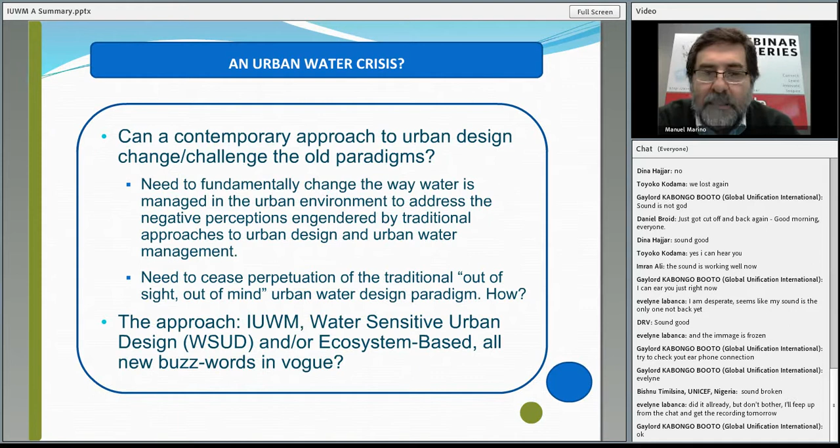Okay, definitions of integrated urban water management. There are quite a few of them around. For me, it's an analysis, it's an instrument to support decisions. It is a new way of looking at water from an urban perspective that takes into consideration what the city is, what the city will be, what the future will be in terms of development for the cities. It affects the development of the city, and the development of the city should affect water management. How we integrate both, and probably the key word here is integrated.

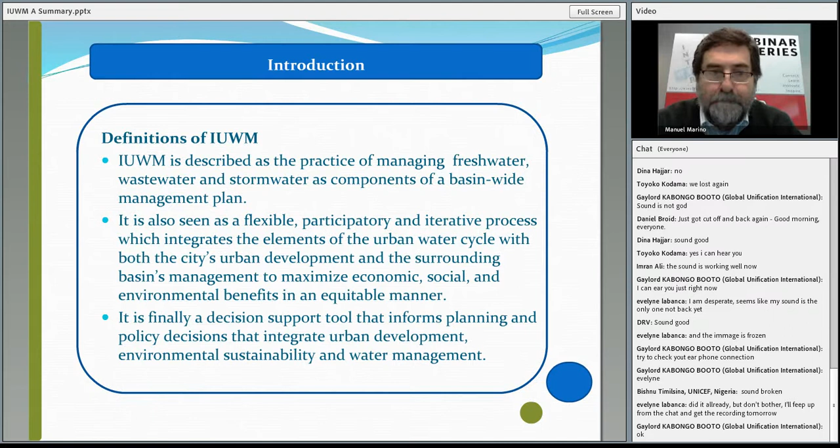The four main elements of integrated urban water management. You have to think of the whole cycle. We have always been talking about the water cycle at the urban area. We have to expand that analysis.

We have to look at our water from all the perspectives, from inside the city, from outside the city, local context. It's not the same thing in Sao Paulo as in Bogota, Buenos Aires, Baku, or Vienna. Each city has its own ways, its own problems, its own challenges. You cannot compare a city that is growing tremendously, like many of the African cities, with the cities that are actually shrinking. So the local context, the environmental, social, cultural, and economic perspectives that I mentioned there are key.

And the last thing is sustainability. This is something that has to be done thinking in the future, where we balance everything: economic, social, environmental needs, in medium and long term.

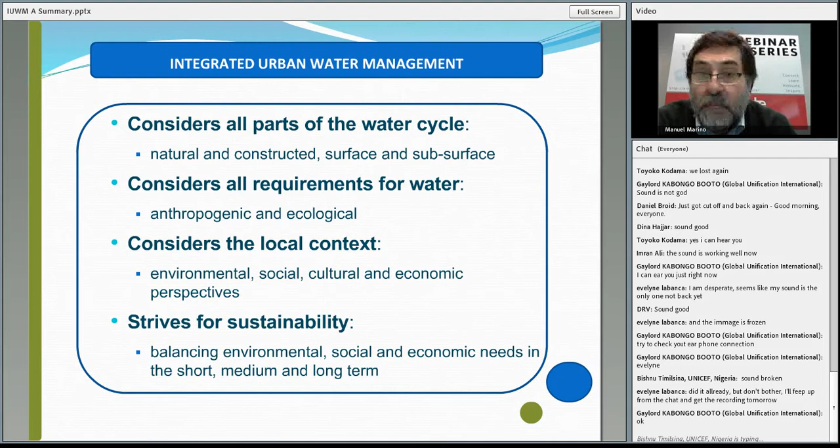Okay. What do we understand by integration? We have five main elements, but I would like to focus particularly on one which is always missed: fully integrated with urban planning. Water until now has always been seen as a mix of engineering actions, pipes and pumps. It is much more than that in the future.

We have to look at all water not only in question of let's hide it, let's bring it easily, but how do we combine what is the city for the future, the city capacity, the realities that we can do with the city with what we do with water, and that's where the key element is for me.

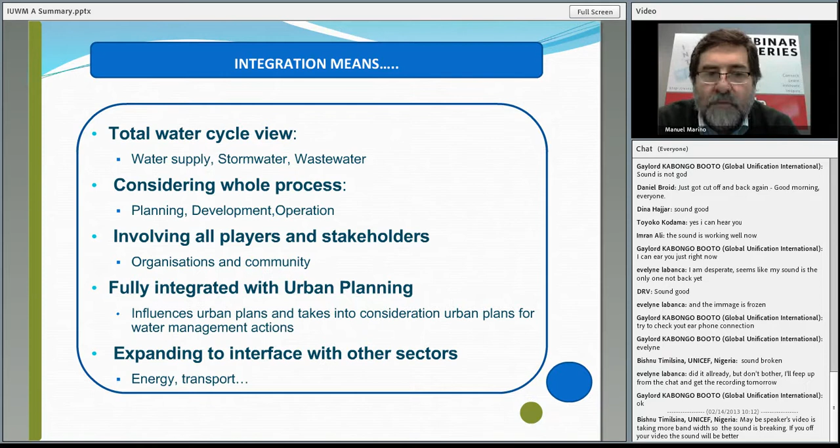In essence, integrated urban water management's main objective is to help policymakers and planners to make decisions that make use of water more efficient, more sustainable. That's in the end the bottom line.

I listed there quite a few things. Let me put just one question for the discussion. Is it too much, or is it an appropriate mix? Are we missing something? You tell me.

We have made several studies here in the bank, pilot studies, and I just tried to summarize here a few of the phrases that came out of the analysis that we have done on the basis of those pilots. Integrated urban water management is not simple. It is something that brings a change in the mentality,

that repeats many of the things we have always been saying, but tries to put them together. It's a holistic approach. It looks at the whole cycle. It includes institutions. It includes capacity building. It has to be flexible.

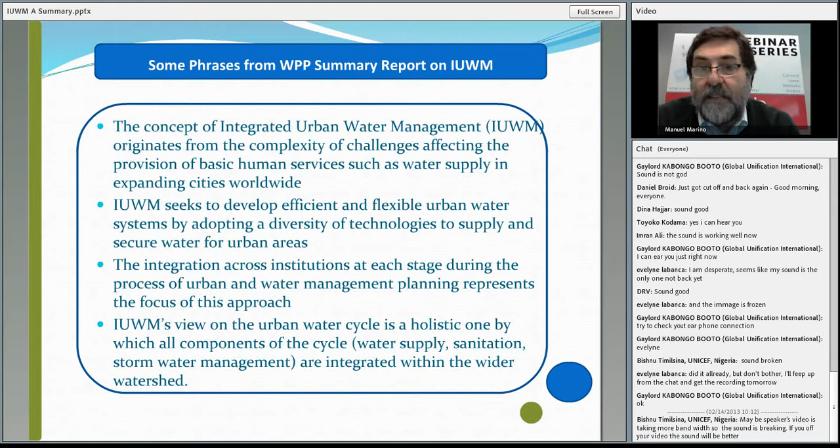All those things. The reality is that we don't know yet what we want to say by integrated urban water management. If you talk to different people, they will come with different ideas. Is that bad or is it right? In my opinion, it is an approach. It is more than anything else.

How we define it. This is a diagram that my colleague Stefan Dahan and I prepared time ago. This is a traditional approach, what we all understood. We have three main flows of water in the city: water supply, wastewater, drainage, and how they are integrated. Well, there are mechanisms there that allow for it, and we always say, okay, yes, there has to be an environmental plan, there has to be a land use plan, and there has to be some integration between them.

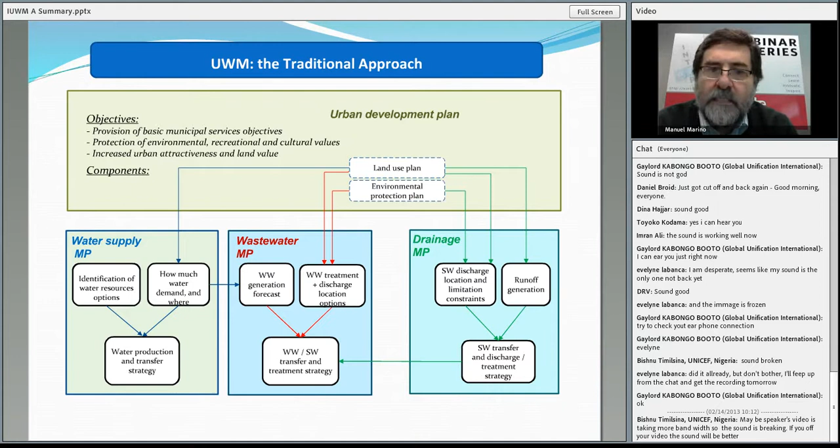What is the next step? It's to think of a city as a complete ecosystem where water from one place and another are linked, and where the linkages between the land use planning and the solutions we adopt for the city affect how drainage is going to take place, how wastewater will be managed, how even water supply is going to be provided. Why do we always have to think of a pipe and a pump and a wastewater treatment plant at the end? Maybe there are other solutions.

And I remember years ago, very good ideas coming forward, but that were adapted to a particular case. But that's the way to go forward, and that's what we want to bring as a potential challenge. So this is actually a challenge to think different, a challenge to think that there might be other ways that could complement the traditional system. So I'm not arguing for something radically different, let's say, let's forget completely about the pipes and the pumps. No.

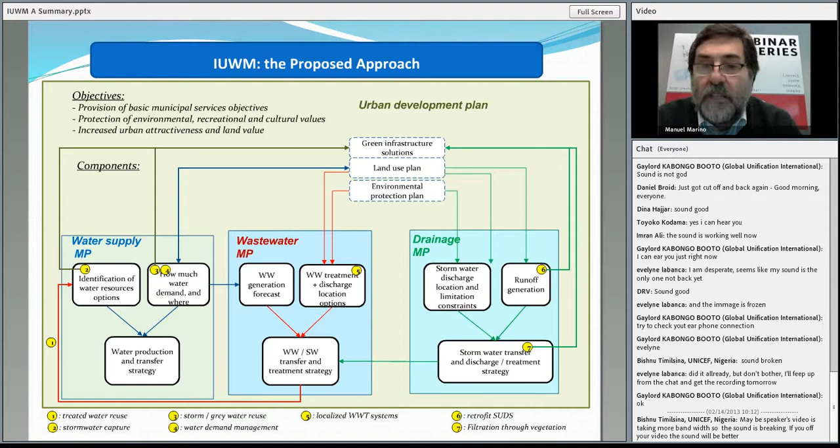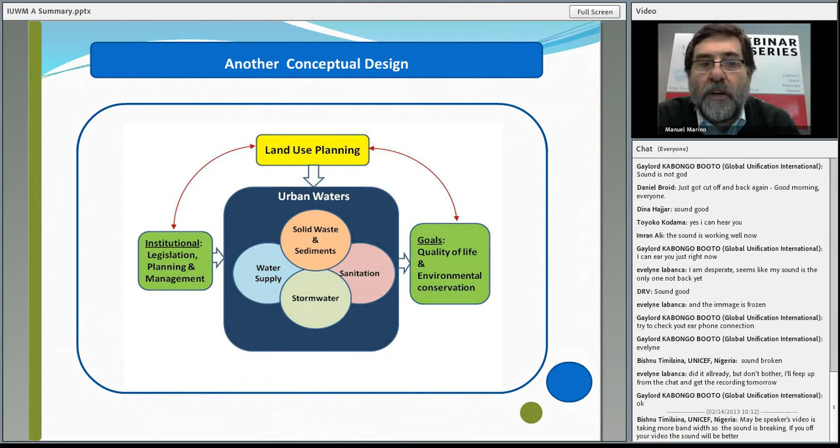But there are other things that could complement that and could reduce the size of the pumps, could reduce the size of the pipes, could even reduce drastically the size of the wastewater treatment plants, and in the end, what matters, will reduce the cost that the population has to pay in order to have this service. There are many other conceptual designs similar to those ones. This is the most common one that tries to integrate all the urban waters with institutions, with goals, quality, land use planning, etc.

So, to summarize this beginning, is it a set of technologies, or is it a way of thinking, a practice? Are the technologies appropriate? The ones that we're thinking of using, do they have to be fixed in the whole system, or should they be applied in a smaller scale? Do we have to look at different actions separately and then try to integrate? Probably that's a good way to do it. Or should we address them all at the beginning? Those are questions for the end.

As I said before, we did years ago, years ago means last year, several activities here in the bank, in the World Bank, on a pilot basis, trying to see what we were talking about. This idea started in parallel years ago in Latin America and in the anchor, the center of our institution. We thought of it in Latin America that it was a nice business development tool, but also that it was the next thing we had to do. What we were doing in water had to move to something more, and that was the idea.

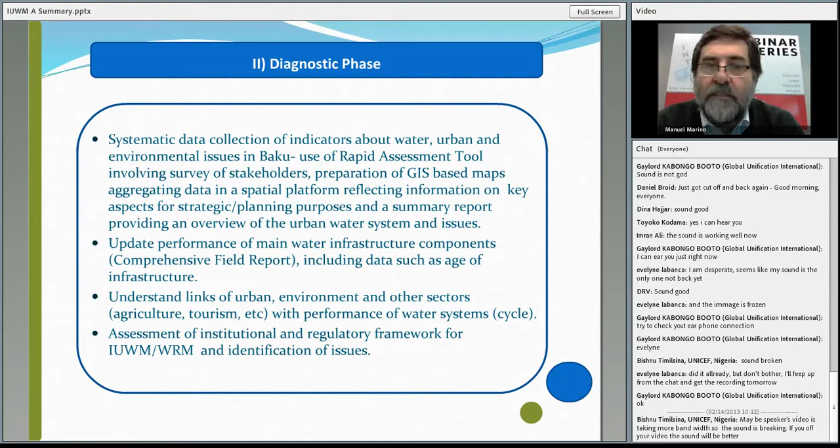Just to give you a quick summary of it, we try to capture all this knowledge into GIS space so that we can present it, we can analyze it, we can work with it. I'm a fan of this instrument. I think it is great, and especially it's very good for presentation to the politicians, which in the end we always have to do. We looked at the peculiarities of water in Baku, for example. Most of the high-rise buildings from the old times, all the piping in the basement, nobody cares for them, so they are leaking, and it's not uncommon to find that most of these buildings, their basement is flooded on a regular basis. So that's a reality.

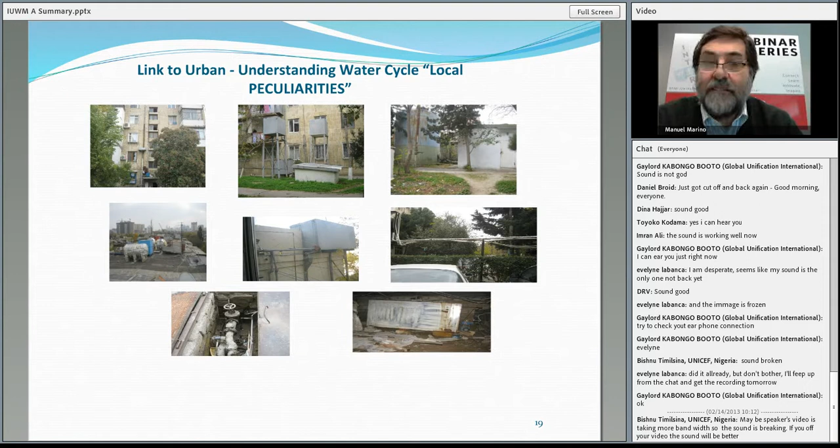A reality you have to understand, because it's different in one place and probably will not affect the other places. From there, we move to the analysis phase. We try to identify impacts, development goals, how these things are linked, how the investments are needed. Try to put an idea of the balance of the city. Try to see what were the causes behind the problems.

This is a good example. This is analysis that my colleague Abel Mejia did. First looking at where water was coming, how much water was being used, where water was going. And if you look at it, Baku probably uses in the order of 90 liters per capita per day, when at the same time it is receiving over 500 liters per capita per day. So that gives you an idea of where the situations are in this city.

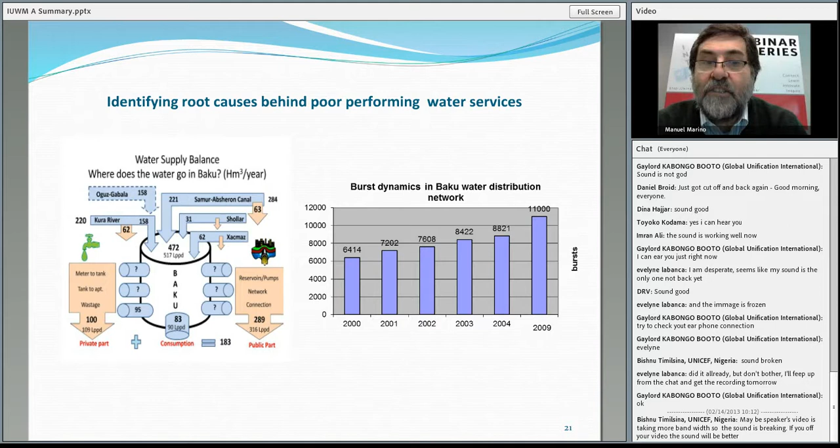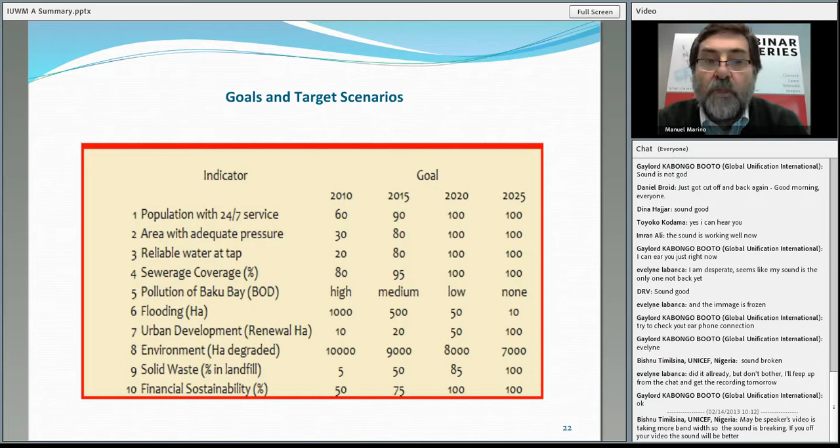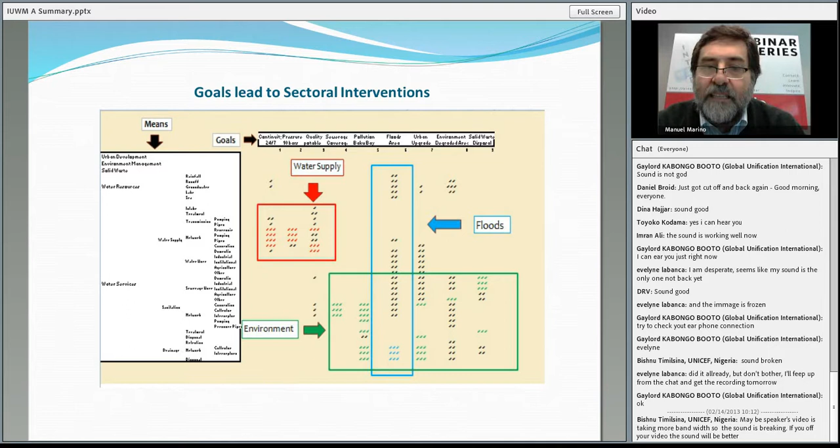We look at the goals and the target scenarios for water, for the development plan for the city, for the water utility, and try to combine them. And trying to combine them, we try to identify which were the main actions that had to be taken into consideration within the water sector, but also in relation between the water sector and the urban development plan that was being prepared in parallel. So we tried to combine these two things in one. Not only integrating water, but integrating water with the rest of the development actions that were taking place in the city at that time.

Finally, we went to a prognosis, look at the scenarios, look at what could be the situations, prepare a report, review it with the stakeholders and the government, and try to summarize the results of it. So in the end, we prepared a document that was presented to the government for their consideration. And hopefully the government will take that into consideration, and we will move into the next steps, and that's something we are presenting to them, and we're working in parallel in water and in urban development.

So that was one of the reasons why we chose Baku, because we thought that this could be something that could be used in the future. It will not be just a theoretical analysis, but something that could become a reality. Okay, that was an approach to do it.

I summarize another one that my colleague and friend David Michel developed in the case of Latin America. There, the main thrust was participatory, bringing the stakeholders, having a tremendous buy-in on the problems, on the analysis of the problems, on the decision what were the priorities, on the decision what could be the solutions. And he prepared this, and this gives an idea. To do it, 16 months. It's a little bit extra time, but okay. These are different ideas. You see, completely different approach, one place or another, by the same institution, by people that have been working together for years. So it depends a lot on where you are, and that makes a difference.

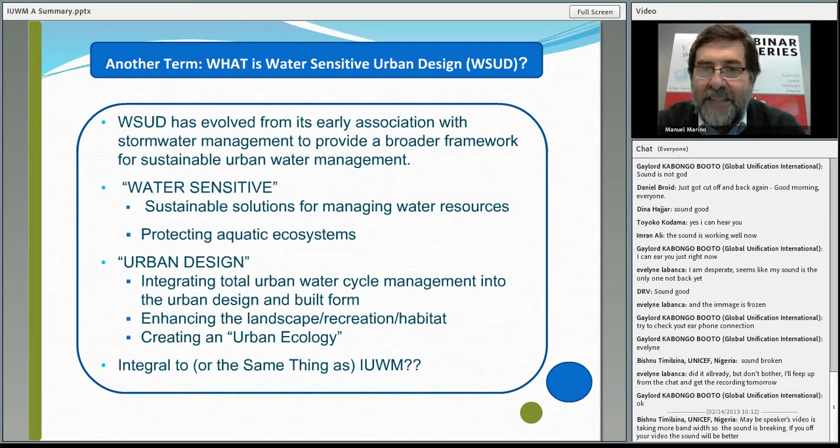Is it the same thing as integrated urban water management? Or is it something different? Is it something that complements integrated urban water management? Well, this is one of the questions for you to get into when we get into the discussion later. For me, let me advance it. It's something that complements it. It's one element of it. It's a focus, one parallel focus of it.

What is it set to achieve? What is the standard practice? Water has to be considered early. Well, that's what we always say. All water streams have to be integrated. That's what we just said for the other one. We have to improve the management. We have to improve the use. That's reduction of use, matching the supply to what is needed, and incorporating the ecosystem-based approach for decision and investment planning.

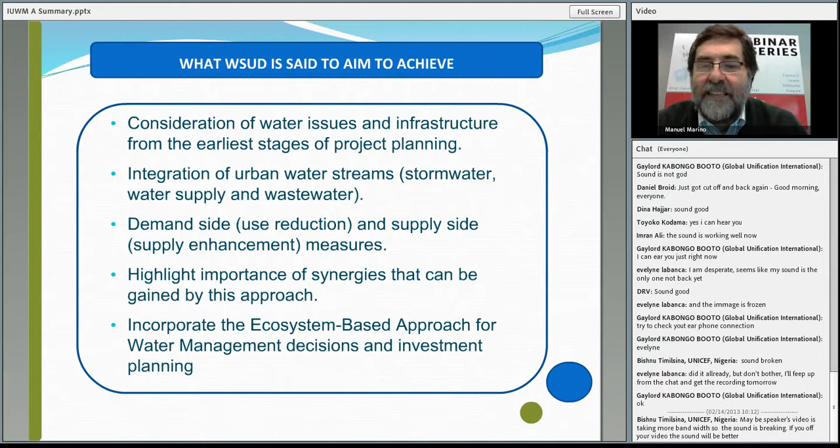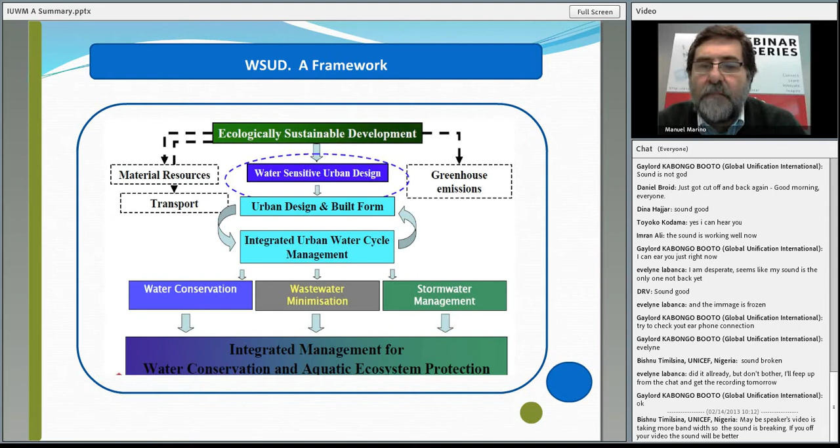That's another term that just comes up. This is the latest of the terms that are becoming fashionable, particularly in the European Union. There's a framework that was developed some time ago. This is taken from the University of Cantabria in Santander, which works for the European Union. They developed this system as part of their process of developing some of the programs for the European Union.

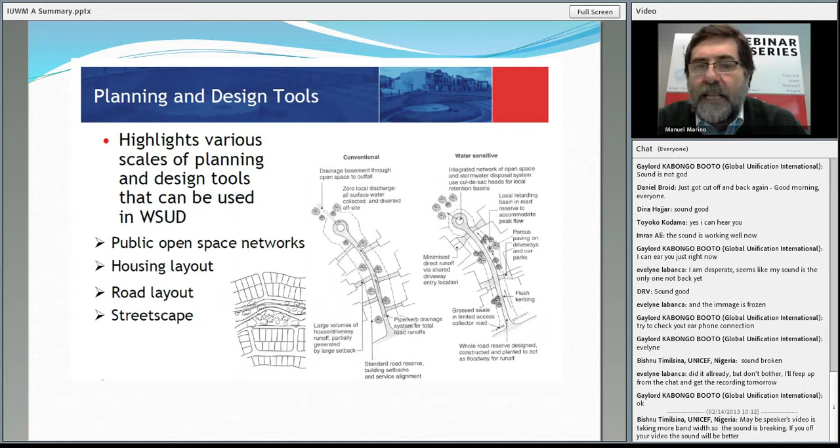They use experience from many other places, particularly from Australia. This is taken from one of their examples on how to work with the conventional systems of development or water-sensitive systems of development, how to integrate all these elements into the development of the city, how to improve reduction of runoff, through that reduction in all the investments that are needed for managing of the floods, just by changing the way cities are designed.

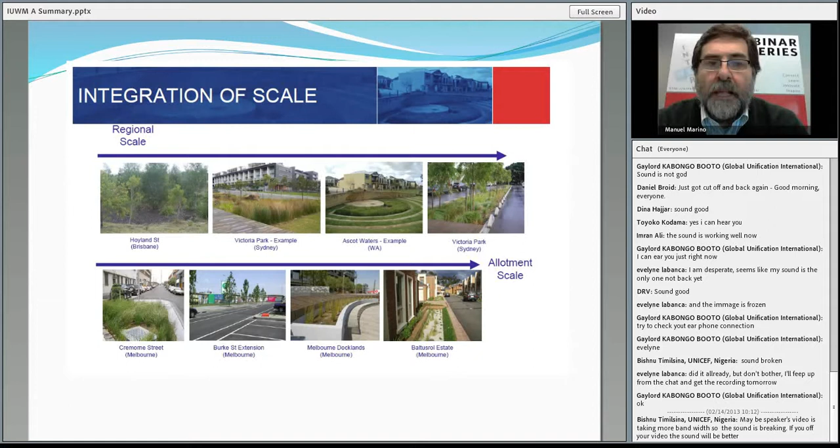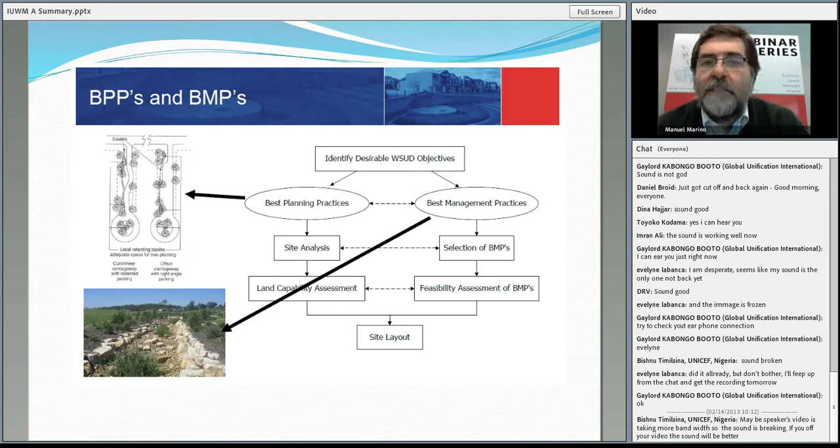How to combine planning and management, how to do the best of one and the other. There are tons of books written on this subject. And then this is combined with the next step, which is the ecosystem-based approach for design. Again, many of you, I'm sure, have heard a lot about ecosystem-based approach. Is this a new idea, or is it more of the same? What is behind it? Is that you decide what are the different uses of parts of the city environment. On the basis of the uses of the ecosystem zoning requirements of that, you define criteria, and on the basis of modeling, you come to what are the better conclusions, what are the better designs.

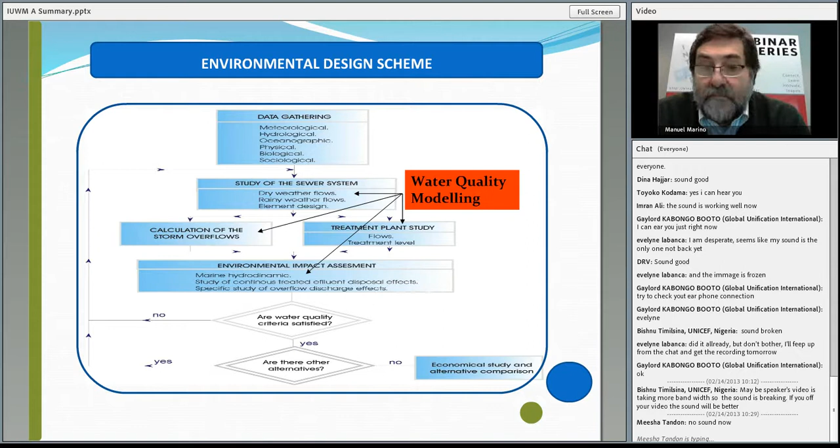Is it different from what we were talking about integrated urban water management? Nope. You are linking all the elements of water with what the city is, what the land use plan is, what the development strategies for the city are. And the only thing you do is that you combine that under a proper water quality modeling, because you have to decide what you are going to do, not on the basis of the standards, but on the basis of what you want to get. Is it a different approach, or is it more of the same?

And here I want to add one point, and I have to rush a little bit because I'm coming late. That I wanted to bring into the discussion is a risk-based approach. Until now, everybody was always thinking that we have to get whatever we were planning for 100% of the time. What about considering that things can fail? What about considering that we should not be designing for 100% reliability of the different elements of the system, but once we have an integrated approach, once we have an integrated framework, we have to assign different risks to different elements of that system and combine them so that those risks are most effective for what we want to get.

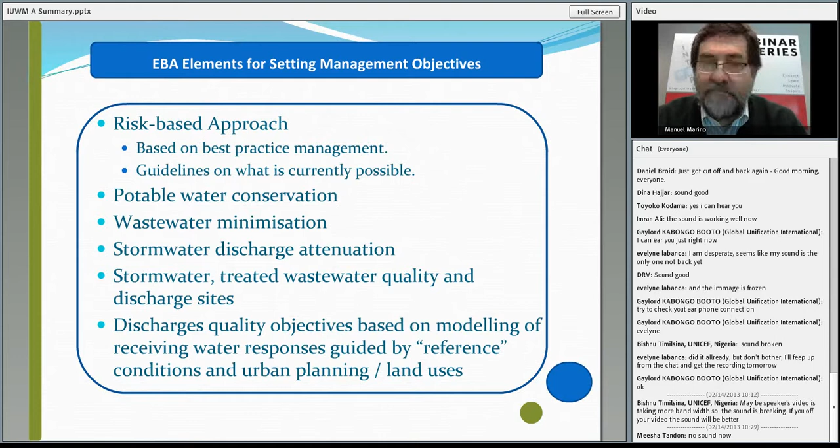So in the end, this is a new dimension that was almost impossible to do years ago because we didn't have the tools. But now we have GIS, we have a lot of information, we have real-time information of almost everything in the water system, the water cycle. And on top of that, we have huge modeling, we have proper planning. What about moving this next step? Well, that's another question for you at the end of this.

And I just couldn't avoid mentioning this. As part of this integrated urban water management, there are many sexy tools coming. One of my favorites is urban water harvesting. Well, urban water harvesting should not be limited to roof water. Everything could be harvested. You could harvest for different uses. The moment you look at it from an integrated point of view, the moment you look at it as a whole cycle, you can look beyond potable water. You can go and think of the overall mix of water in the urban environment, and that is one element that I always wanted to say.

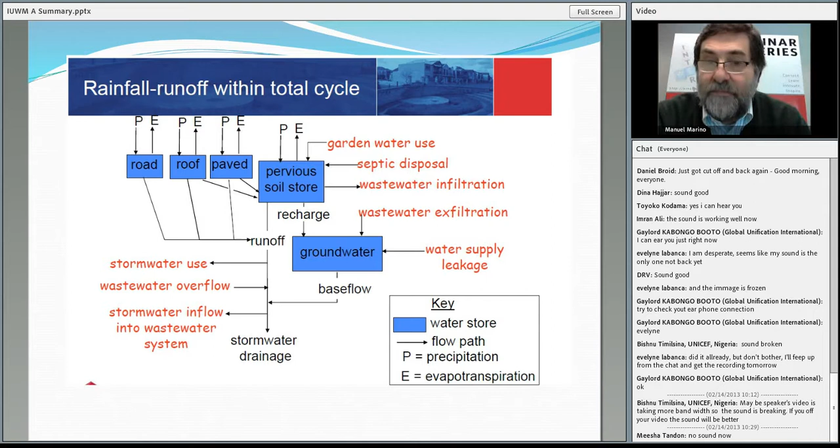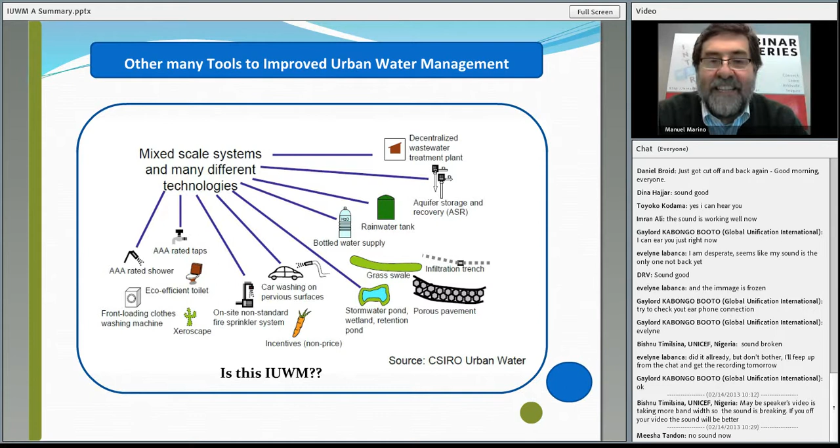This diagram I put here because it summarizes pretty well that idea that everything is interlinked, that you should not have just one perspective, that you should have a very broad perspective. Tools, many. Is integrated urban water management the tools, or is it the combination of them? Is it the philosophy? Is it the way of thinking? Is it the new approach? Well, that's what we're thinking of it.

Okay, after all these ideas, there are opportunities. Is this just another fashion, as I said at the beginning, or not? Well, let me give you my take. I think it's a must. We cannot afford to continue doing things the way we were doing. We have to start thinking of doing different. And definitely in our institutions, we are the ones that have to have the leadership to move these forward.

It's not easy because you have to combine many entrenched ideas and ways of doing things that are not what has to be done. So we have to be prepared to do things differently. I would like to highlight from that whole thing this. We have to prepare to do things differently. We have to be prepared to push for new tools, new thinking.

You have to select the approach. It depends on your own particular conditions. You have to decide the scales. Sometimes not the whole city is the scale. Probably not only the city is the scale. Probably you have to go beyond the city and go into the basin. The combination of the scales with different strategies, that's what probably is the best option.

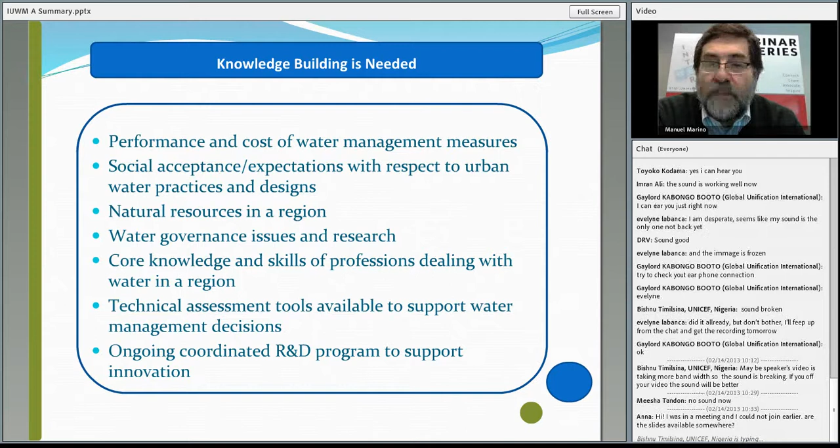We have to generate more knowledge. We have to include issues like governance into the whole perspective. We have to help develop much more the capacity of local staff. So let me give you some ideas that I've written here that I cut and paste from reports that I've been looking at, and give you my take on those.

First, what we mean by this is not closed. There is much more we have to work, much more we have to discuss. And as I said before, and as I repeat here, the focus might be different in different regions. The focus might be completely different in different cities within the same region. It is a beneficial tool, yes, indeed. And as I said before, I think this is a must. It's not a possibility. It's a must. We have to move into it.

It is effective, definitely. The experience and the pilot that we have done shows that clearly it improves efficiency. You have to take also into consideration the economics of it. It's not just a question of is it good or not. No, you have to move beyond that. You have to include economics in it. You have to think, what are you getting out of it? What is the difference of doing it or not doing it?